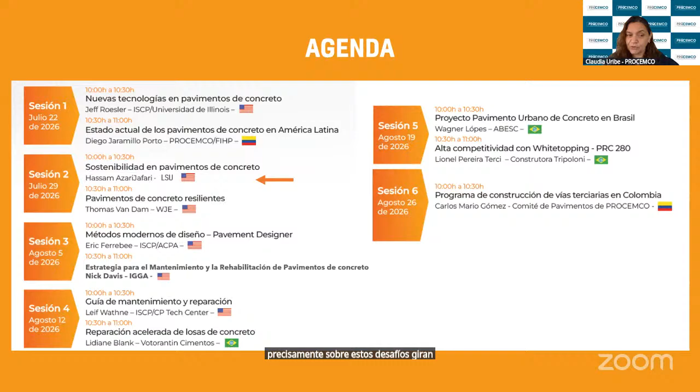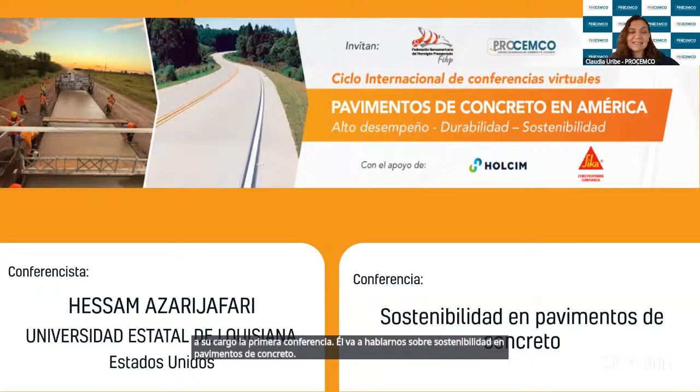Para la primera, es un verdadero gusto darle la bienvenida al profesor Hessam Azarijafari, que tiene a su cargo la primera conferencia. Él va a hablarnos sobre sostenibilidad en pavimentos de concreto. Hessam Azarijafari es profesor asistente del Departamento de Gestión de la Construcción de la Universidad Estatal de Luisiana en Estados Unidos, donde desarrolla investigación en el campo de la sostenibilidad aplicada a edificios e infraestructura, con especial énfasis en la evaluación del ciclo de vida. Es miembro activo del American Concrete Institute, el ACI, donde lidera el Comité de Educación en Sostenibilidad y coordina desde 2017 el reconocido concurso estudiantil Ecoconcreto, promoviendo la formación de nuevas generaciones de ingenieros comprometidos con la construcción sostenible. Su trabajo académico e investigativo está orientado al desarrollo de soluciones que reduzcan el impacto ambiental de la infraestructura y fortalezcan la gestión más responsable del entorno construido.

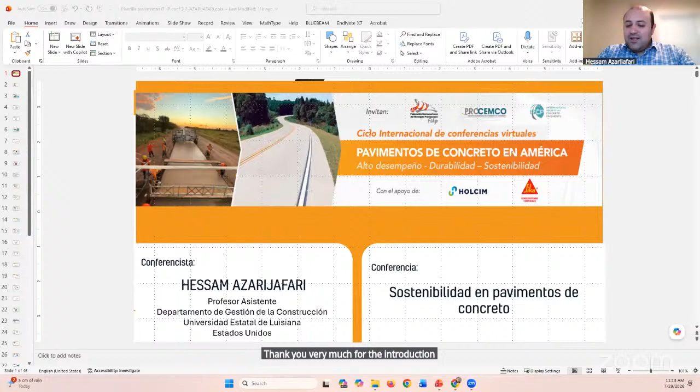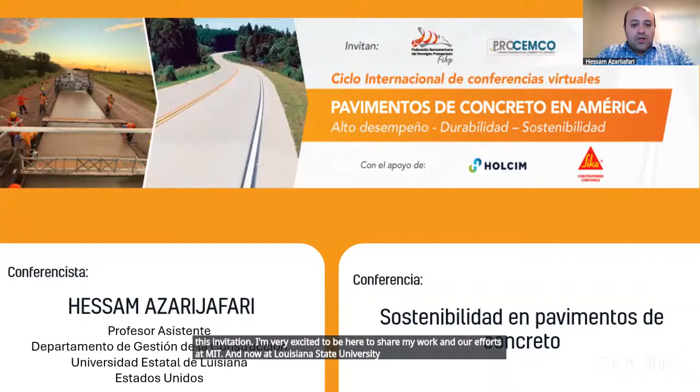Profesor Azarijafari, muchas gracias por aceptar la invitación. Bienvenido a este espacio. Thank you very much for this invitation. I'm very excited to be here to share my work and our efforts at MIT and now at Louisiana State University, where I'm working as an assistant professor to discuss what I have learned from the research and implementation efforts around life cycle assessments of the pavements.

In order to start this presentation, I would like to bring this important point to your attention about the pavement's total carbon footprint, that even in social media and in different venues, we can see that the life cycle thinking has started to penetrate into people's minds. Even ordinary and less technical people are very much aware of that.

This is just one example that I wanted to share with you around the use of recycled materials, that it sounds great, but until you consider that it requires more construction workers to maintain it, meaning that it implies the life cycle assessments and the amount of investments that we eventually need to consider to maintain these roads and make this road serviceable in general, and it would be able to be used by the vehicles.

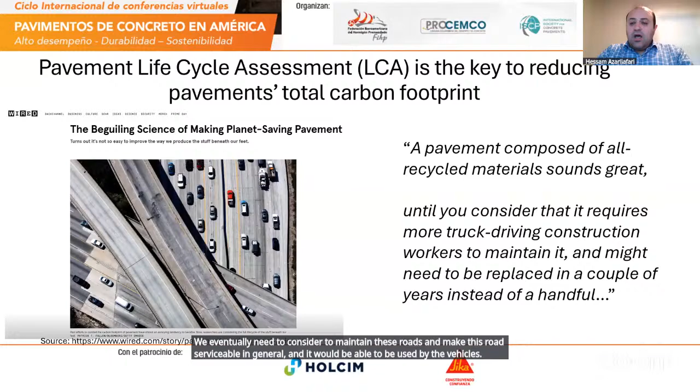But how can we do that? Obviously, the approach that we recommend is considering the whole life cycle, and it's a critical approach because there are a lot of influences that pavements can have on our built environment, particularly during their long service life and their use phase. So, in addition to the materials production that you can see on the left, and it includes the impacts of, for example, raw materials extraction, emissions due to energy consumption, and process chemistry associated with the production of, for example, Portland cement, and the amount of fuels that we need for the vehicles to build the roads, for example. We have the use-phase components over the 50 to 100-year lifetime of the pavements and the interactions that pavement has with multiple parts of our built environment.

And finally, the end of life, where we think about this huge amount of materials that should be demolished, but we need to think about a responsible environmental stewardship and include that in our recycling or reusing exercises, depending on what we have locally available.

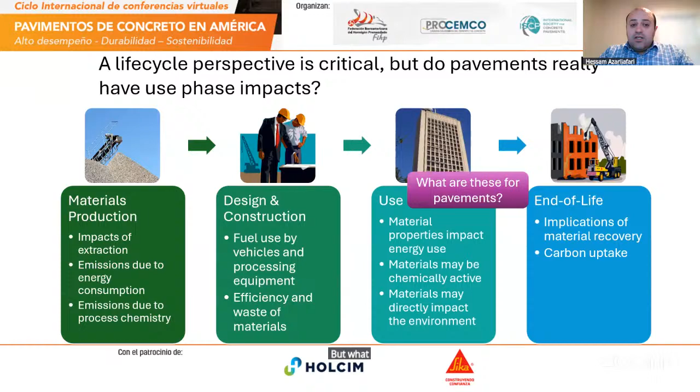But what are the use phase impacts for the pavements? If I want to summarize that into a small figure, it adds two major components. One part is the pavement-vehicle interaction effects, where the quality and structural response of the pavements can influence the fuel consumption of the vehicles on the road.

More specifically, the surface roughness of the pavements can influence the excess fuel consumption induced by rolling resistance. On the other side, there is excess fuel consumption induced by the rigidity or stiffness of the pavements. This is very pronounced in hot weather conditions, where the materials are sensitive to temperature, losing elasticity or deformation under the tires when the tire meets the road.

On the other side, we have the albedo effect, relevant to another property of the pavement: the surface reflectance. If we have a brighter pavement, we absorb less heat in our urban areas, and our climate won't get much warmer. But if we have a darker surface, we absorb more heat, and the temperature goes up in urban areas. This has two different implications.

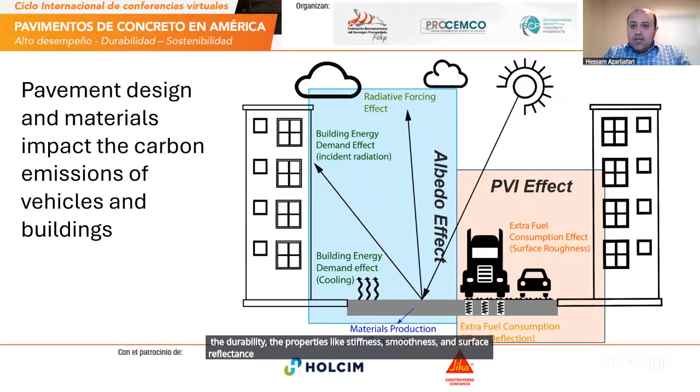How can we think about low carbon concrete pavements, or low carbon pavements in general? We see that current policies target materials emission reduction, which we call upfront emission reduction. But with the levers and solutions available to engineers, we would be able to reduce the environmental impacts of pavements over the life cycle much more significantly.

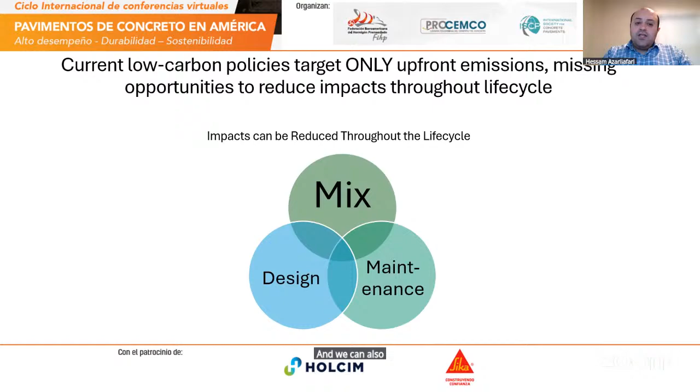So we can think about mix design, and we can think about pavement geometrical design in terms of the thickness of layers or the configuration of rebars, joint spacing, etc. We can also think about changing our maintenance and repair schedules in the future. But the regulations are more about low carbon concrete from a materials perspective. This is really important because we definitely need to reduce the materials impact emissions.

But if we only focus on materials, there are two opportunities we lose. First, as shown earlier, materials properties impact the rest of the life cycle through durability, smoothness, stiffness, and reflectance of the pavements. If we can get a pavement to deteriorate less, or if we have stiffer or more reflective pavements, we can definitely reduce the climate change impacts from a life cycle perspective.

Second, if we don't consider the whole life cycle, we lose the opportunities to reduce emissions during the use and end-of-life phase. If we only focus on materials, there's a limited set of solutions, such as replacing Portland cement with alternative or low carbon binders.

But think about how we can change our maintenance and repair schedules, how we can increase the reflectance of the pavements, or how we can mitigate environmental impacts by inducing circularity and getting credit for end-of-life recycling. So the scope is broad. There are multiple solutions, but we need the right tool to examine the effectiveness of these solutions.

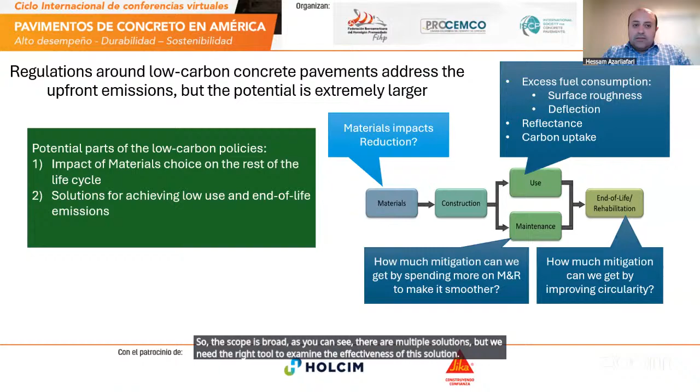Pavement LCA tools are developed and have been used by practitioners and researchers. But there are generally some gaps here to facilitate the use of pavement LCA for decision-making purposes.

First, conducting pavement LCA is costly and labor-intensive. You need to collect a lot of data, and you need a more streamlined approach with more data available to overcome this issue.

Also, we're talking about the next few decades of the pavement life cycle. Pavement is a long life product, speaking from an industrial ecology perspective. So thinking about what parameters can change and what are the ranges of uncertainty, we want to examine whether the decision on the environmentally preferable pavement is valid and robust enough under uncertainty.

So we definitely need to consider a probabilistic comparative analysis among different options. I will show you how we did it at MIT over the past decade or so of research and implementation, and show you some examples here.

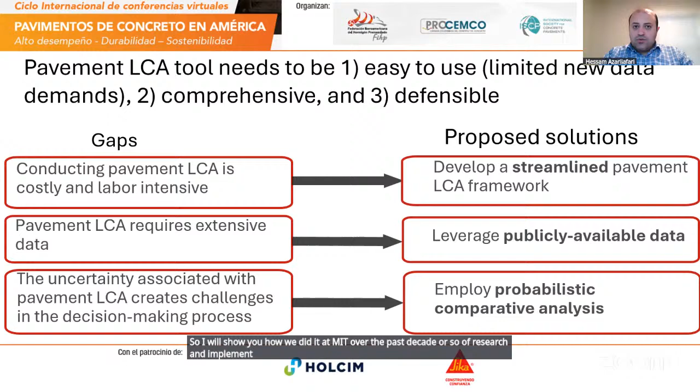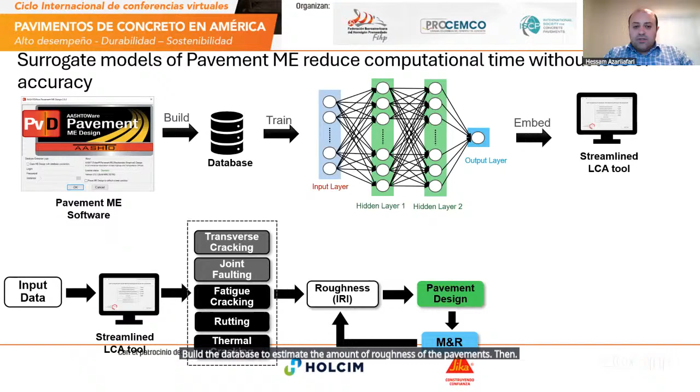We have surrogate models developed, leveraging the power of AI, to build a database to estimate the amount of roughness of the pavements. Then based on the roughness, we will design the pavements and the maintenance and repair schedule.

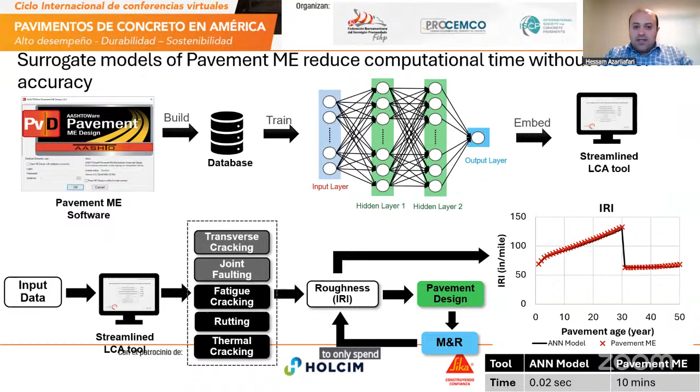Instead of spending 10 minutes on software, we will only spend a fraction of a second to get our results. This is the tool that is publicly available, and you're more than welcome to go use the online tool and give us feedback.

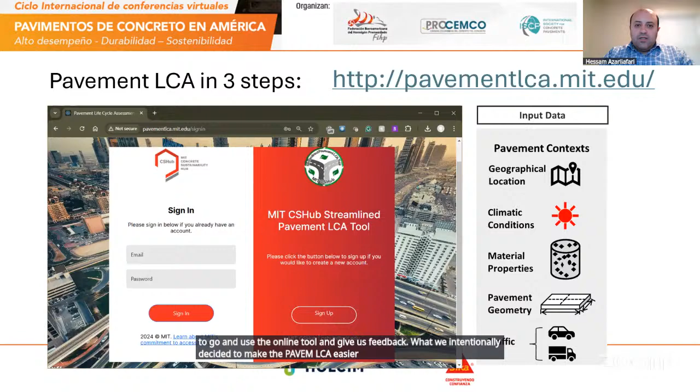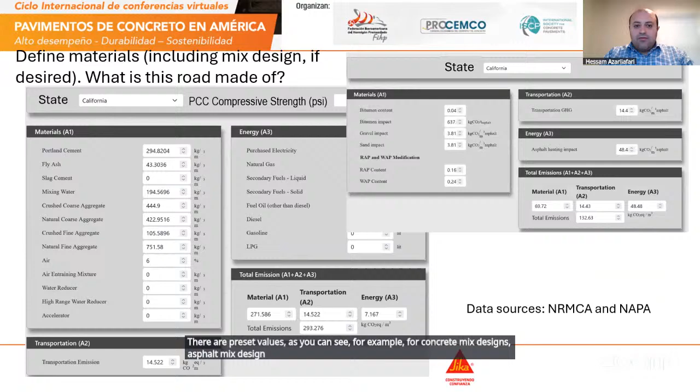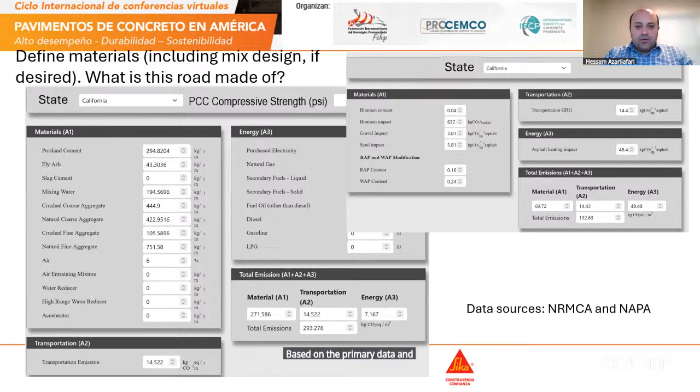We intentionally designed it to make the pavement LCA easier for everyone in the value chain with limited information. There are preset values, for example for concrete mix designs and asphalt mix design based on the geographical condition and available data, but you are still able to change these values based on the primary data you already have in order to evaluate the environmental impacts.

There is a design feature already embedded in the pavement LCA tool. You can either consider AASHTO 93 design, which is an old design approach, or use mechanistic empirical design, which is a more relevant and recent approach. So you can examine different design approaches and methods to design the thickness of the pavements based on the properties and types of materials you intend to use.

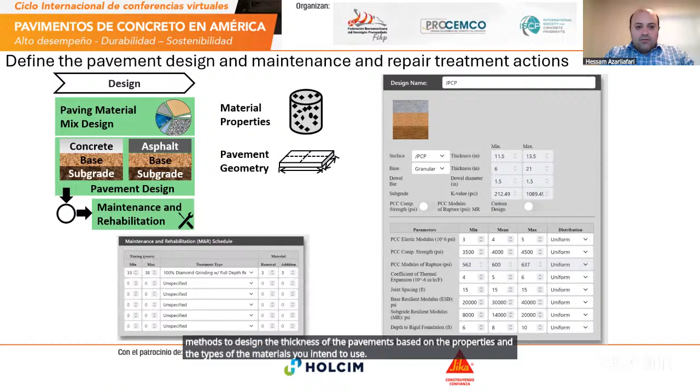You will define the maintenance and rehabilitation actions, and then it's easy to see the results. So in 3 steps, you would be able to see the results of your pavements. You can definitely refine it, get back to it, and see how it changes.

For example, this is a California urban interstate highway with 74,800 annual average daily traffic, around 11% truck traffic, and a 1 mile segment. We compared a hot mix asphalt, shown as the red line over the life cycle, with a jointed plain concrete pavement.

You can see that the concrete pavement starts higher at the beginning from the embodied emissions or materials production emissions, but because the concrete pavement stays smoother over the course of time, we don't see any significant increase in the emissions.

But for asphalt, we can see that we have a crossover after 11 years because of the significant increase in roughness based on the California design.

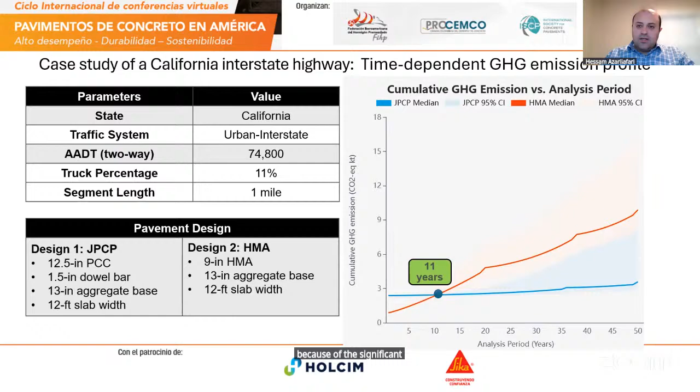You can also see the cumulative environmental impacts. The previous figure showed you the annual environmental impacts, but here you can see how much emissions come from what part of the life cycle.

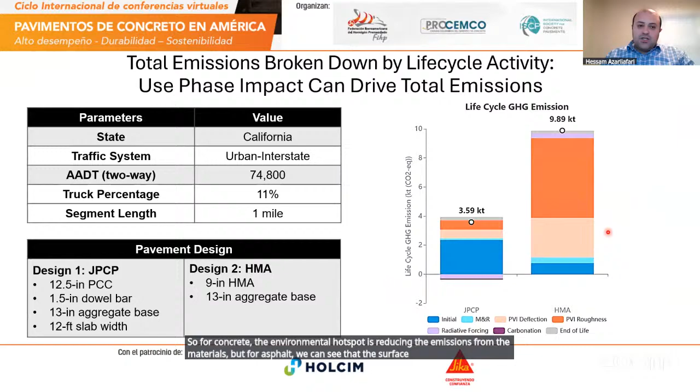For example, the blue part is the emissions associated with materials production. The orange part is relevant to pavement-vehicle interactions, or the excess fuel consumption induced by pavement properties. So for concrete, the environmental hotspot is reducing emissions from the materials, but for asphalt, the surface roughness and deflection of the pavements matter a lot.

You can also see the results in other figures and formats. You can track the International Roughness Index, IRI, as a function of time for different types of pavements. You can see the proportion of emissions from embodied and operational, or use-phase, impacts over the course of time.

As I mentioned earlier, there is a great feature that allows you to see the results probabilistically. You can see the distribution of the outputs based on the ranges and the inputs that you have defined.

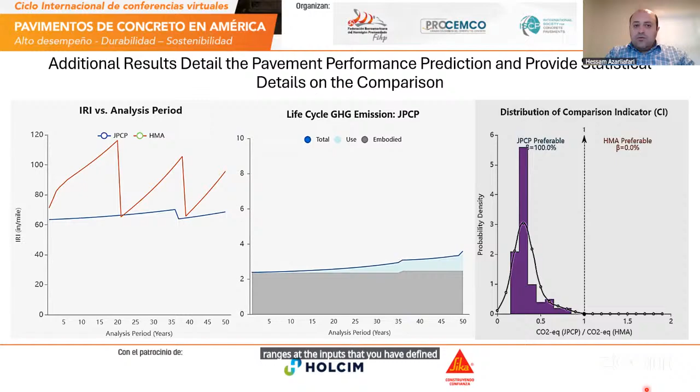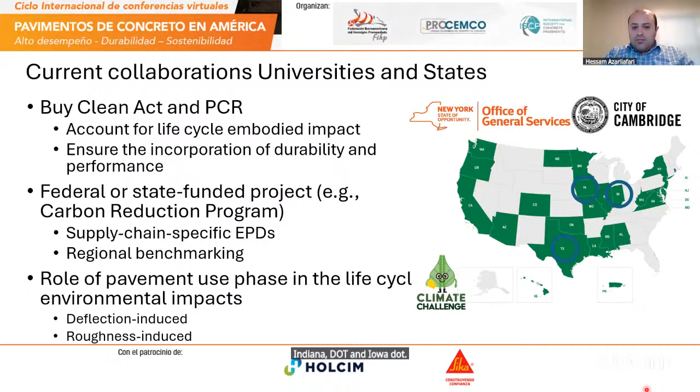We use this tool to collaborate a lot with different states. Over the past 5 to 6 years, we've had the opportunity to collaborate with states like Texas DOT, Indiana DOT, and Iowa DOT. I'm going to show you some examples from these DOTs.

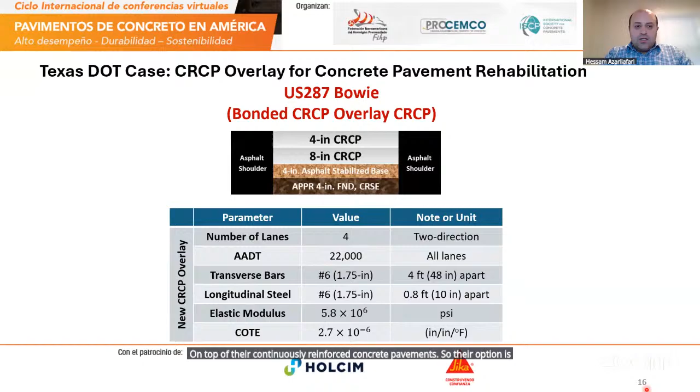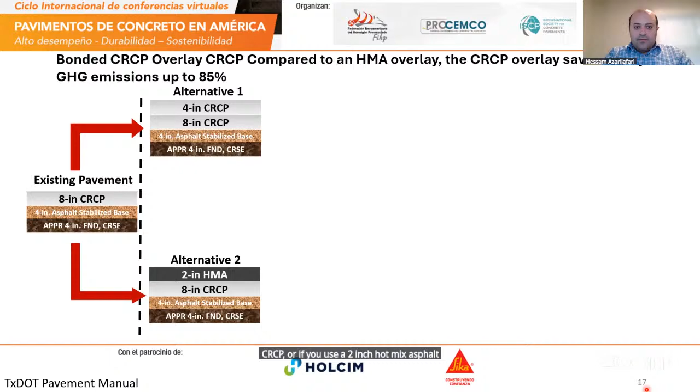The first one is a case study we did with the Texas DOT. They wanted to evaluate how to consider an overlay on top of their continuously reinforced concrete pavements. Their option was either a 4-inch CRCP on top of the existing CRCP, or a 2-inch hot mix asphalt overlay. The tool was used to evaluate the life cycle emissions.

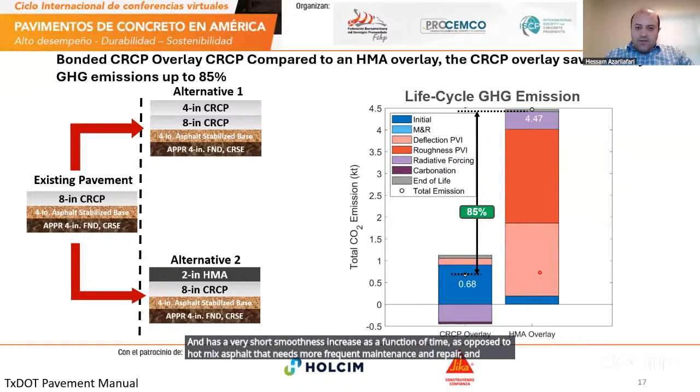As you can see, the CRCP option shows much lower environmental impacts owing to the benefits of retaining smoothness, with a very short smoothness increase as a function of time, as opposed to hot mix asphalt that needs more frequent maintenance and repair, resulting in more significant use-phase emissions.

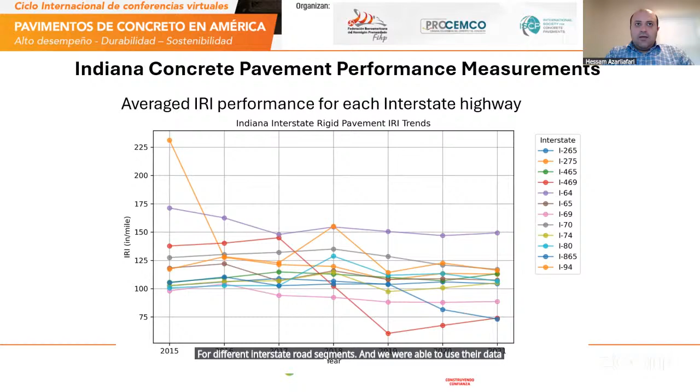The other case study we did with Indiana DOT was a similar approach. They don't have continuously reinforced concrete pavements, but they are evaluating options between jointed plain concrete pavements and asphalt for reconstruction projects. The difference between Texas and Indiana was that Indiana has their own observed, experimentally measured IRI data for different interstate road segments, which they shared with us, and we were able to use it to build a deterioration model for the pavements.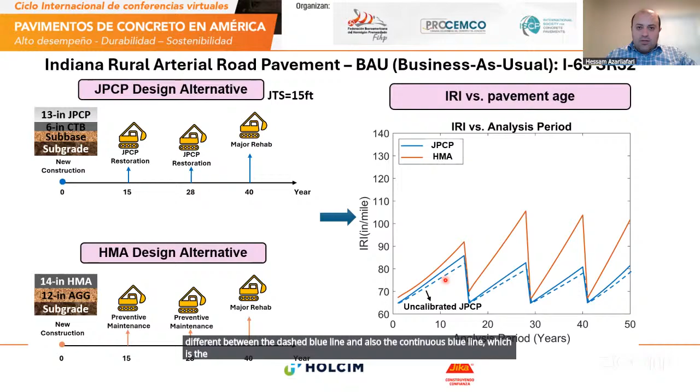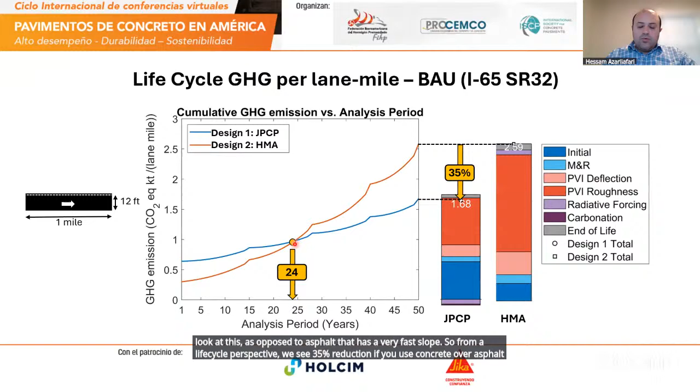But how about the results when we compare jointed plain concrete pavements against hot mix asphalt? The blue one is concrete, the red one is asphalt. Concrete starts larger at the beginning from an environmental impacts perspective, but because of the slower deterioration rate, we have a slighter slope, as opposed to asphalt that has a very fast slope. From a life cycle perspective, we see a 35% reduction if you use concrete over asphalt, and the crossover point is after 24 years of service life.

We talked a lot about environmental impacts, but another important factor in the decision-making process with state and local agencies is cost. This was important feedback we received from multiple stakeholders, that in addition to life cycle GHG emissions, we need to consider life cycle cost, so we put these next to each other for a more comprehensive decision on the sustainability of the pavement.

With this new feature we've added to the tool, we were able to compare the cost. This is the same case study for Indiana DOT, and you can see the cost of the concrete and asphalt at the beginning is almost the same.

Again, because we have lower user cost, meaning less fuel consumption from vehicles driving on the road, we have a smoother increase in the cost of concrete pavements, but a much faster deterioration rate and therefore higher user cost for asphalt in the end. This equals around a 24% life cycle cost reduction, and the crossover point is after 13 years. So from a cost perspective, our turnover will be faster, and we get our investment back much faster from cost savings.

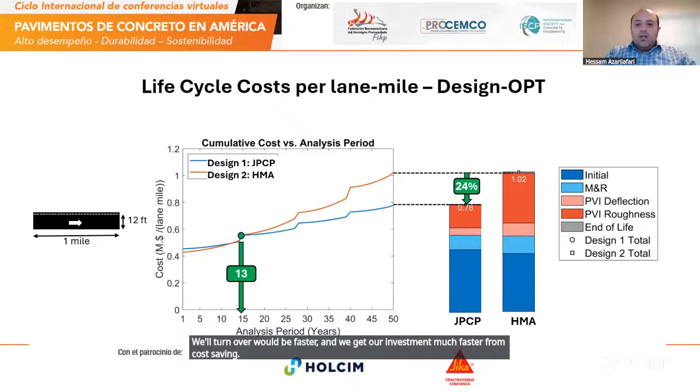So these are some of the features for case studies and the options and multiple alternatives that the DOTs already had, in order to make a decision about whether option A is better than option B, whether concrete is better than asphalt, or whether asphalt overlay is better than, for example, continuously reinforced concrete pavements.

But there is always an opportunity to go above and beyond, and that's about the optimization of the pavements. As I mentioned earlier, as design engineers we have a lot of options under our control. This could include geometrical parameters relevant to the thickness of the pavement layers, rebar sizes and spacings for joints and rebars, and the types of shoulder.

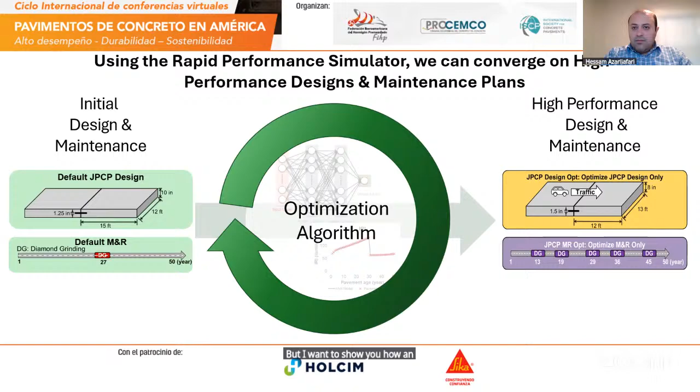So when we think about all these parameters, it makes it a little bit more complex to find the optimized solution. And when you consider both the cost and environmental impacts, evaluating both objective functions makes things much more complicated. But I want to show you how an optimization algorithm has helped us reduce emissions much more substantially. This is a case study that we did for the state of Massachusetts.

The current jointed plain concrete pavement, which is the first row, I call business as usual. It has 15-foot joint spacing, 10-inch concrete thickness. The slab width is 12 feet, and the dowel diameter used is 1.5 inch size.

In the second permutation, we decreased the joint spacing from 15 to 12, but kept the other design parameters constant. Then we reduced the thickness in addition to joint spacing to see if we save a little more materials, decreasing thickness from 10 to 9 inches, to check how much environmental impact will be saved. Finally, we increased the slab width from 12 to 13 feet in the last case study.

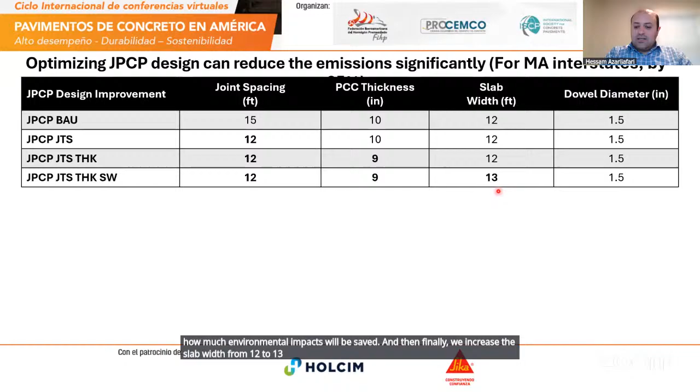Here are the results for the life cycle CO2 emissions. There's always an asphalt alternative here, with lower upfront emissions but much larger use-based emissions. Then there's the jointed plain concrete pavement business-as-usual case. If we apply the joint spacing reduction strategy, we get a little bit of reduction in environmental impacts.

But surprisingly, when we decreased the thickness of the pavement, we saved a little material upfront, but the deterioration of the pavement was faster. So we didn't really get much benefit, and actually had larger emissions compared to only changing the joint spacing. Finally, by just increasing the slab width by 1 foot, we were able to achieve a 35% reduction in environmental impacts. This 35% reduction changes the crossover point from 22 years to 14 years. So a substantial GHG emission reduction just from changing a design parameter.

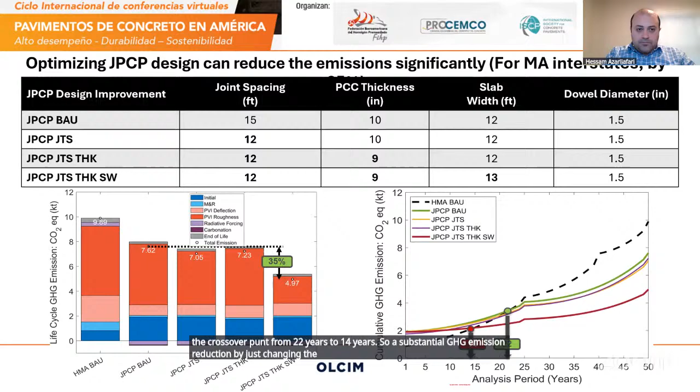The last case study I'd like to share is the Iowa DOT case. It's an interstate highway with 57,000 ADT, traffic growth of 2.5%, and a relatively larger truck percentage because it's a rural road.

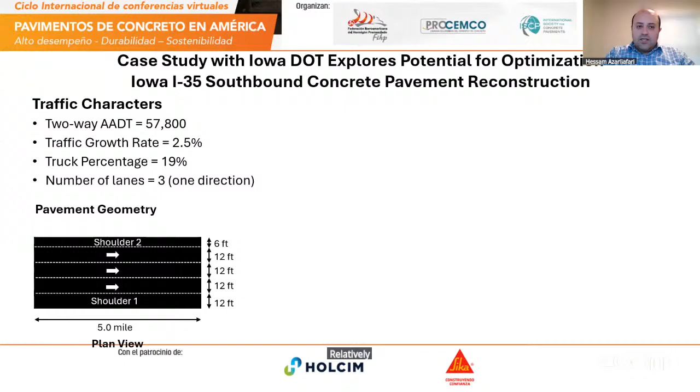Their first option is 11.5-inch jointed plain concrete pavement on top of a 6-inch aggregate base. Their alternative option is 14.5-inch asphalt pavement on a 12-inch aggregate base. For the concrete, their historical parameters and documents show that they need to resurface the concrete pavement with an asphalt overlay after 33 years.

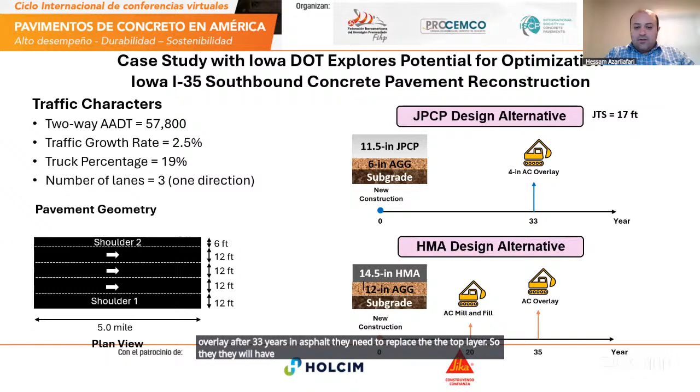For asphalt, they need to replace the top layer, so there's a mill and fill after 20 years, and after 35 years there's an asphalt overlay. We got the data from them to calibrate the deterioration model and therefore the coefficients for estimating IRI, cracking, faulting, and all the road distresses.

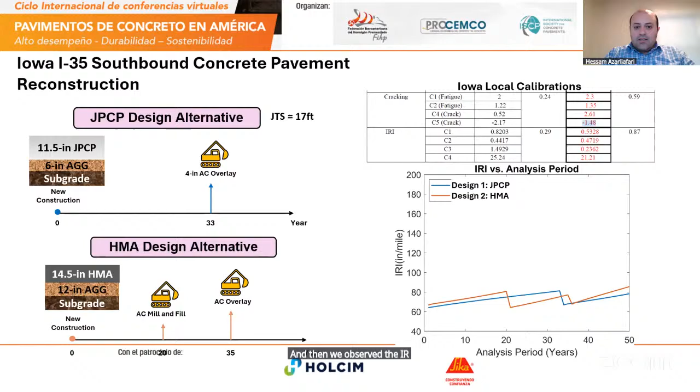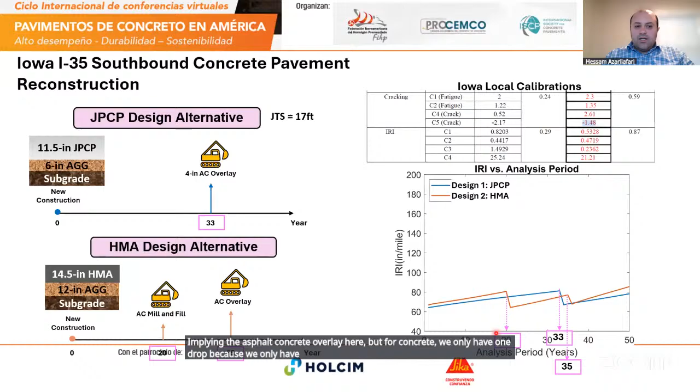Then we observed the IRI versus the analysis period based on the newly calibrated model. You can easily see the impact of maintenance and repair. For example, for asphalt, the red line, after 20 years we have a drop in IRI, meaning the surface was milled and filled with a new layer of asphalt. Then after 35 years we have another drop, implying the asphalt concrete overlay. But for concrete, we only have one drop because we only have a 4-inch asphalt overlay after 33 years.

Here are the results comparing the baseline versus the optimization we performed, from two perspectives. One is where we only optimize the maintenance and repair actions—the timing and type of maintenance based on what the DOT already had available, nothing extraordinary or academic, but something the DOT can already practice. We got a 39% reduction in environmental impacts by only optimizing maintenance.

But if we have the opportunity to both optimize the maintenance and the initial design of the pavements, then we get a substantial 44% GHG emissions reduction. From a cost perspective, optimizing both maintenance and design reduces life cycle cost by 12%. So clearly, looking into pavement management systems, design parameters, and maintenance and repair actions on the road can save a lot of money for the DOTs.

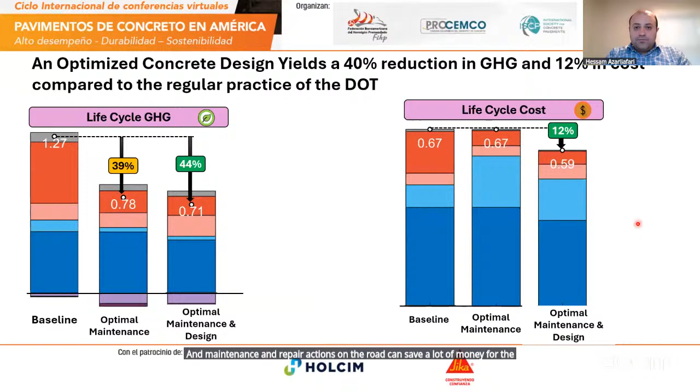And this is my last slide, just as a reminder that we are doing a good job. We are doing our due diligence to reduce materials emissions, and companies and value chain stakeholders are thinking about low carbon binder systems, which is the right approach to move forward.

But there are other opportunities over the life cycle that we can enable by using materials and by leveraging their properties. There are other solutions we can implement during the use phase and end of life of concrete, or any type of pavement, to lower emissions. This can only be done when we have life cycle emissions in mind and consider the whole life cycle scope.

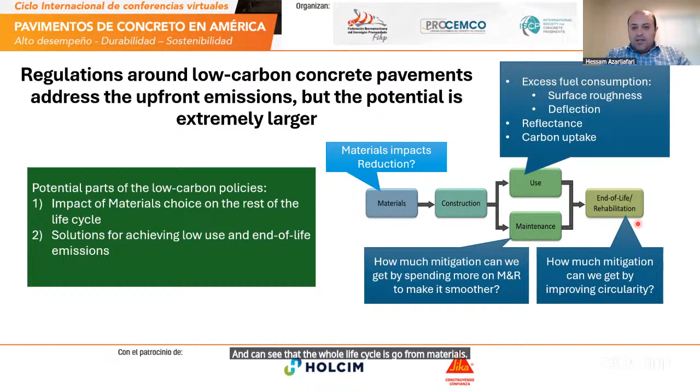From materials, construction, use and maintenance to the end of life. With that, I would like to thank you for joining this presentation and I'm happy to take any questions. I'll hand it back over to Claudia.

And looking at how we will respond to climate change, which could be brought about by our consumption and our greenhouse gas emissions. I'll start with the basic fact that Colombia's roads must stay open. We have many challenges for Colombia, as we do around the world, with the changing climate. In Colombia specifically, we have mountainous terrain, steep slopes, and very high rainfall in parts of the country that can produce flooding.

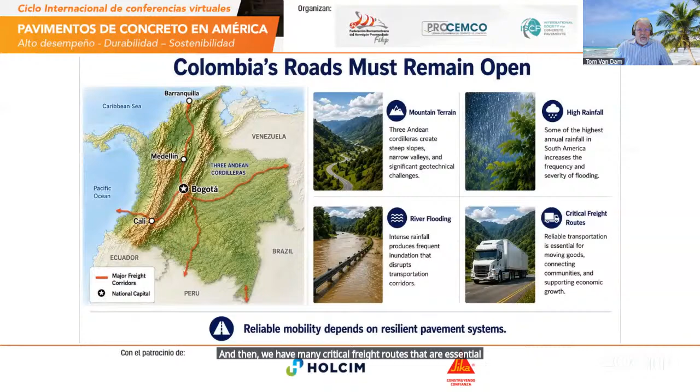We also have a very large coastline that will have a tendency to continue to flood as sea levels rise. Even as sea levels rise, it will lead to riverine flooding, because as the tide increases, it acts as a dam to the river, so rivers back from the coast will flood for many kilometers. We also have many critical freight routes essential to Colombia's economy, and our challenge is to keep those open as the climate changes.

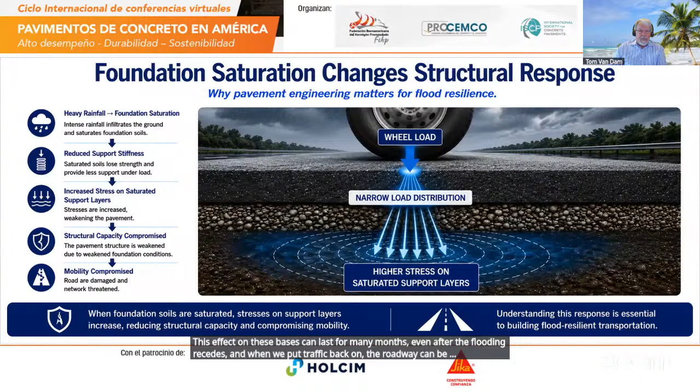The major challenge we look at with flooding is saturation of the supporting layers. We rely on these layers to support the base and then the surface of the pavement. As these unstabilized subgrades and base courses become saturated, they become very weak. The reduction in support stiffness results in increased stress throughout the layers and the surface, ultimately compromising our structural ability to carry loads. This effect can last for many months even after flooding recedes, and when we put traffic back on, the roadway can be compromised, so our mobility and ability to ship freight becomes compromised.

Concrete pavements actually offer an excellent alternative to help mitigate some of these effects. We still have heavy rainfall and base saturation will occur, but concrete, by the way it is designed, naturally spreads that load out. This spreading reduces the stress in the underlying layers, giving us dramatic improvement in structural capacity. With this increase in resilience, we can maintain mobility during and immediately after flooding events, which supports our communities in a much greater fashion than if we lost our mobility.

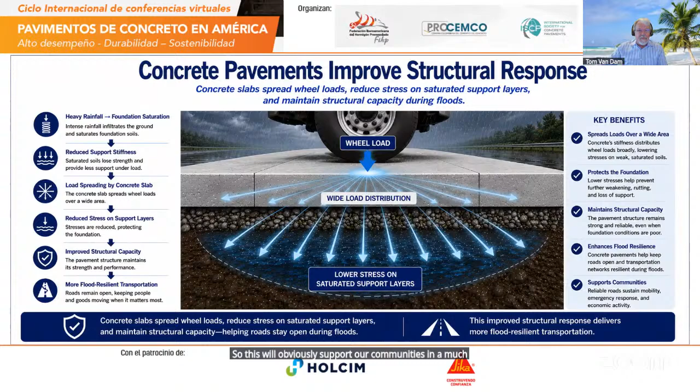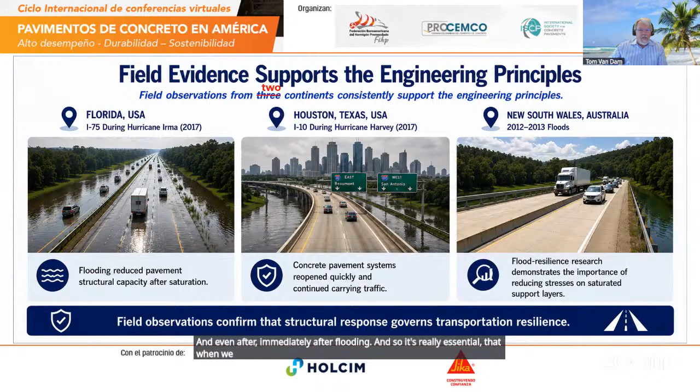Now, there's a lot of field evidence that supports these engineering principles. Originally, when I had this slide, I had 3 continents, and now we're down to 2. But I think those of you who follow politics in the United States may consider places like Florida and Houston, Texas, maybe on a different continent and maybe planet. But that aside, there are many examples from around the world, including the 3 that I show here, in which concrete pavements have provided excellent resilience, that traffic was being able to be maintained when flooded, and even immediately after flooding. And so it's really essential that when we look at the engineering principles, that we see them borne out in case studies.

So engineering strategies that we can apply to make pavements more flood resistant include really 5 things.

One is we can improve our drainability. Drainability improvement will have limited effects where inundation occurs, where the water creeps up to and over the roadway. But in situations where there's still a place to drain water, getting the water out off the pavement and from under the pavement and out into the ditches is one really good strategy.

A second strategy is to stabilize those support layers. This could be done using geosynthetic materials like geogrids, or chemically through lime stabilization, cement stabilization. So basically stiffen up and make those supporting layers less susceptible to moisture.

As I mentioned, concrete pavements right in the middle is an excellent solution. So if we build concrete pavements as our new pavement type, that load gets spread out, and by doing that, we will have excellent improvement in resiliency.

As a treatment, concrete overlays are an excellent choice. Even relatively thin overlays of 3 to 4 inches over an asphalt pavement, for example, can have the same impact of spreading the load out and adding a lot more resilience.

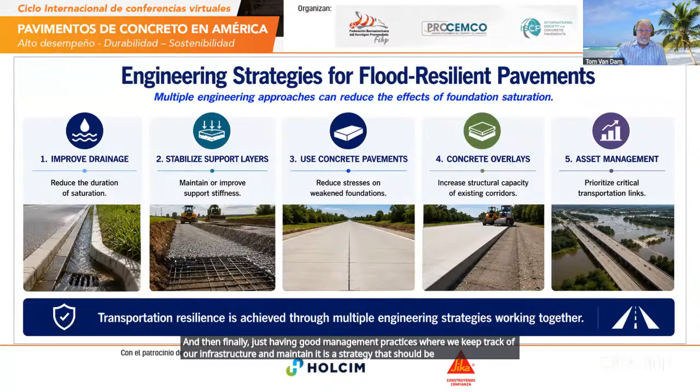Now, the FHWA in the United States has done and continues to do work looking at resilient pavement systems. They more or less have come up with a resilience framework. I'll go through this in a little bit more detail in the next slide. But the bottom line is really to approach through understanding, assess the impacts, select our alternatives, implement those alternatives, and then monitor.

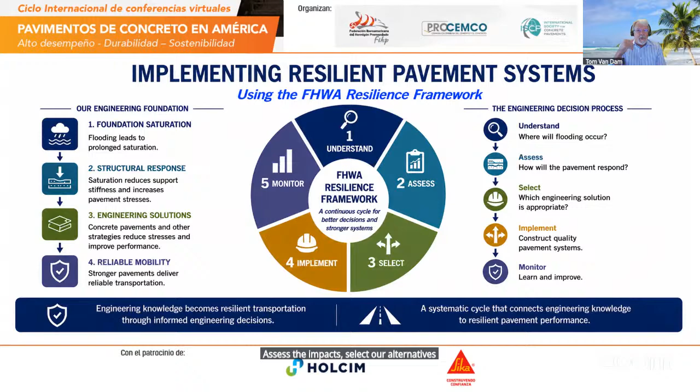And so illustrating that a little bit more detail, in the understanding, there are two elements to it. One is to understand where flood risks exist. And so this requires future projection, looking where flooding would be expected, both interior in the country along rivers and also along coastlines. Once you identify where the flooding occurs, at the same time, you're also looking at where your critical routes are. And so you overlay the two, those routes that are most critical to serving the community, providing access for to hospitals, to food, to employment, for freight. So you identify those two.

So basically, we look at now then the roadways, moving on to the second one, and assess how susceptible that specific vulnerable links would be to flooding. So we can evaluate the support conditions. We can look at the amount of unstabilized layers and whether if these layers get flooded, how weak they will become. And this idea is at this point, we can identify those critical links that are both going to be subjected to flooding and are critical to our economy and also are going to be vulnerable to this flooding.

Once we've selected them, now we can look at solutions. The solutions that we can look at is we can compare alternatives. And if we're looking at reconstructing a link, we can bring about all of these critical elements into consideration. But one of the big ones that we'll talk about, and we have talked about, is concrete pavements. If the link is already a well-established asphalt link, concrete overlays could be considered as an alternative.

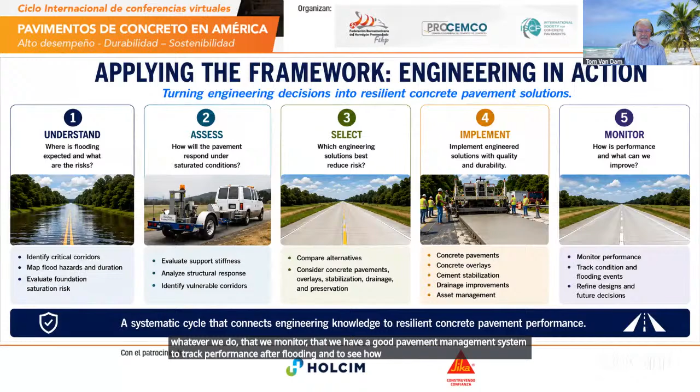And then finally is this idea of monitoring, where we want to make sure that whatever we do, that we monitor, that we have a good pavement management system to track performance after flooding and to see how effective we're being in mitigating the issues caused by the flooding.

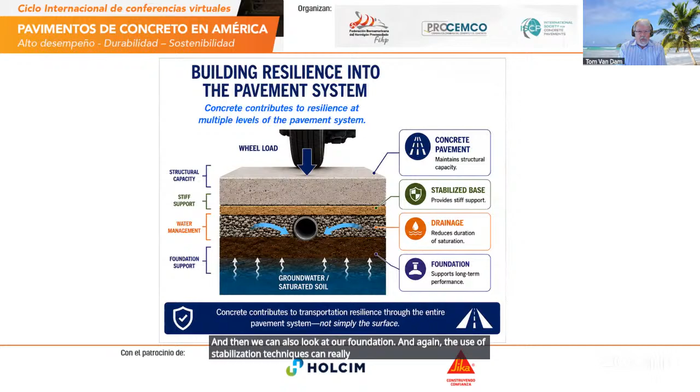Building that resilient pavement system really focuses on good structural capacity. Concrete pavement provides that over various flooding conditions. We can look at providing a stiff support that could be a stabilized material, cement treated or asphalt treated, which won't lose stiffness due to flooding. We can implement drainage, and then we can also look at our foundation. The use of stabilization techniques can really help make a soil far less susceptible to flooding.

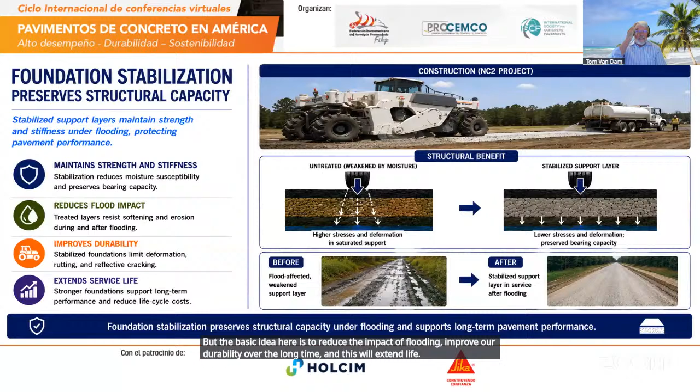Regarding stabilization, this is fairly easy to implement more broadly if you're not already employing it. With certain clay soils, it could be a matter of stabilizing with lime, or we can also stabilize with cement. We can also use mechanical stabilization through geogrids and similar materials. The basic idea is to reduce the impact of flooding, improve durability over the long term, and extend life. It starts with the base layers and moves upward.

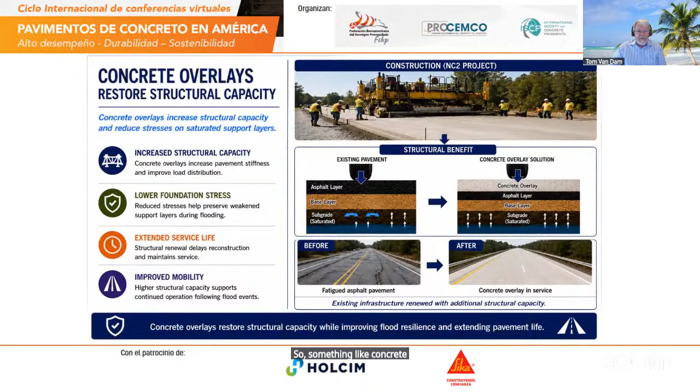Looking at our network, we already have a well-developed network, potentially of asphalt or even granular roadways. Those would be excellent candidates to treat with a concrete overlay. These overlays can be fairly thin, as thin as 75 millimeters, or brought up as thick as 150 millimeters to carry very heavy traffic. It's a very quick solution. If you're not doing concrete overlays, you should be considering employing them.

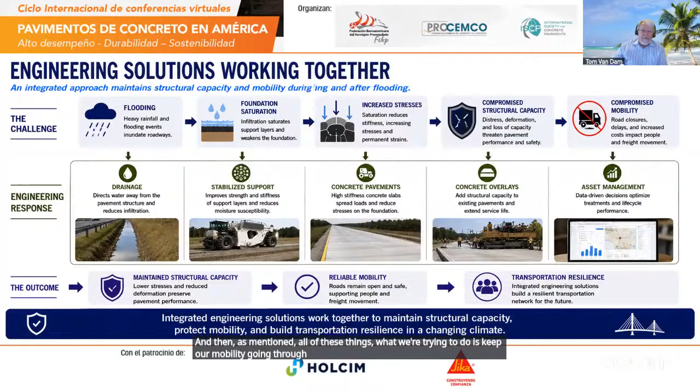The bottom line is that these engineering solutions work best together. Understanding where we're going to flood, understanding that this will cause our foundations to saturate, and making them less susceptible to saturation is key. We know saturation can increase stress - an excellent application for newly constructed concrete pavement. Where we know a roadway is going to be compromised, made of materials more susceptible to damage, it's an excellent choice for a concrete overlay. What we're trying to do is keep our mobility going through whatever flooding event we experience.

So circling back, what does this mean for Colombia? The freight corridors - it's really important that we keep these open. It's also extremely important that we keep communities connected to hospitals, employment, education. Recognizing where those could be compromised is the first step. We know that mountain highways in particular are going to be very vulnerable to flooding. We also know that coastal areas, immediately in the vicinity of the coast, and often where rivers come into the coast, where the rising tide will act as a dam and cause riverine flooding well upstream. All of these things are a challenge to us, and so we need to invest in these long-term solutions that are based on concrete.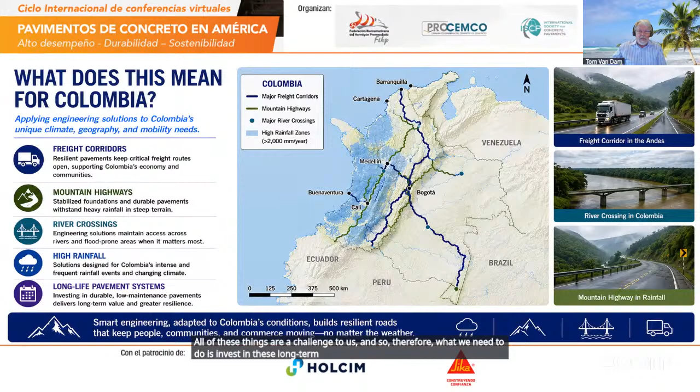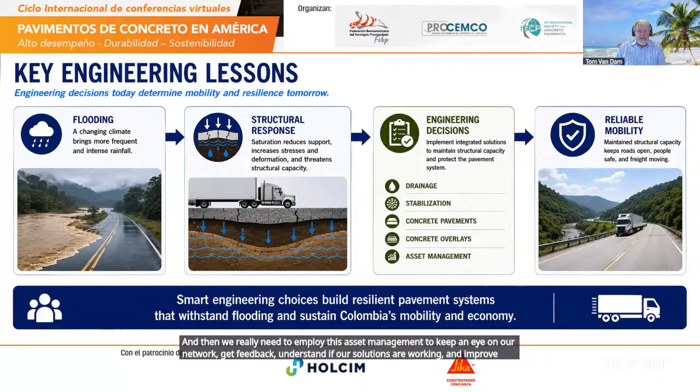So the key engineering lessons: we know that flooding is occurring. We also know that the changing climate is likely to bring even greater amounts of flooding along coastlines and rivers. We know this will compromise our structural response by weakening the supporting layers, and therefore we need to make solid engineering decisions, both in looking at our drainage - including ditch lines and subsurface drainage - and stabilization. When building new pavements, we need to stabilize those supporting layers. We should consider concrete pavement for many reasons, one of them being to improve our resilience. We should be looking at concrete overlays as a solution to existing flexible or granular pavements. We really need to employ asset management to keep an eye on our network, get feedback, understand if our solutions are working, and improve. In the end, this will create a far more reliable system.

So the final takeaways are: flooding is increasing and will continue to increase. Hassan talked about greenhouse gas emissions - they continue to increase, and even though we're making efforts to reduce that, we know we're going to see a continuing change in the climate that will lead to flooding. The effect of this flooding on our structural response to the pavements is going to determine our ability to use those pavements.

Engineering solutions make the difference. Once we understand the flooding is going to occur and the vulnerability of our system, this is where we can employ drainage, stabilization, concrete pavements, and overlays to really help our network have better resilience, and then track it through good asset management. What we want is an integrated approach - we want to make sure we continue to collect this data, bring about solutions, and improve. In the end, these resilient pavements are going to support people and progress and economic growth.

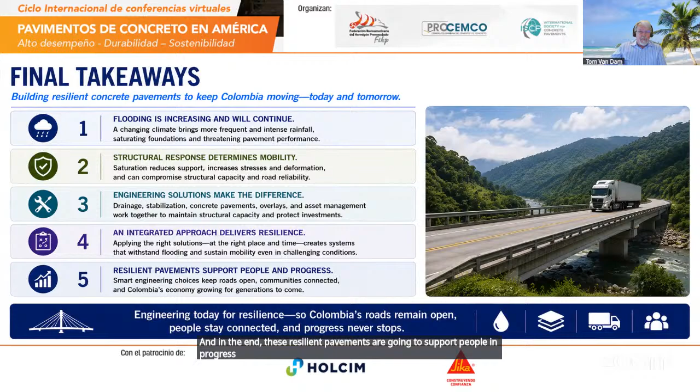I did want to end by talking about some ongoing work that I'm involved with. There's going to be a new National Cooperative Highway Research Program report coming out very soon. This work has been conducted over the last few years, and it's going to be a very extensive effort, providing guidance on quantifying flood impacts, supporting resilient design, and providing practical guidance, such as what I've talked about.

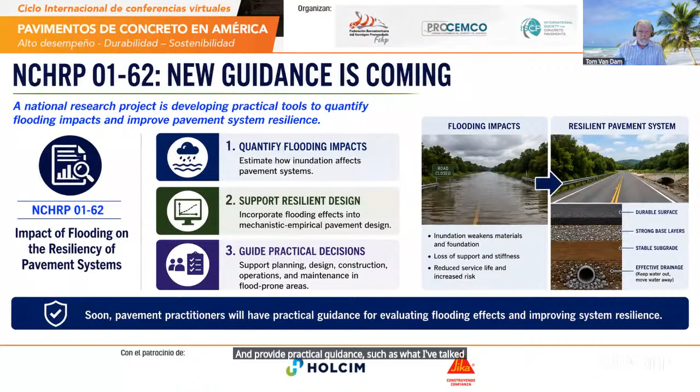Timeline on this: we're looking at basically a practical guide that will produce flooding impact methods. There's going to be a mechanistic empirical design framework, an implementation memo, and then there will be plenty of webinars available that you could tap into.

The draft guide and interim report is coming up, due in just a few weeks, so I've been feeling a little pressure there. We expect to have the revised guide completed in November and submitted to the panel, but there will be review, and then final products will show up early next year.

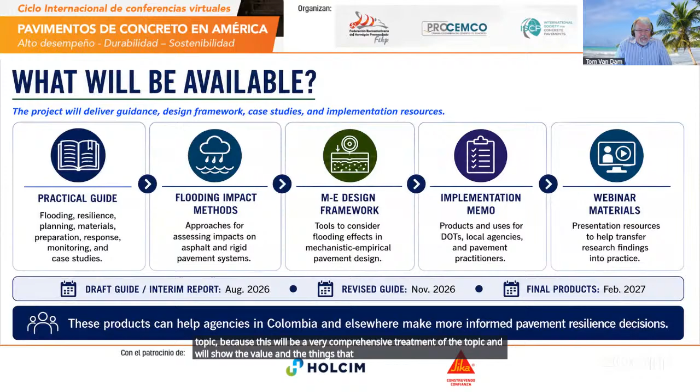I would encourage you to keep an eye on this if you're interested in this topic, because this will be a very comprehensive treatment of the topic, and will show the value of the things I've talked about: drainage, soil stabilization, and concrete pavement solutions.